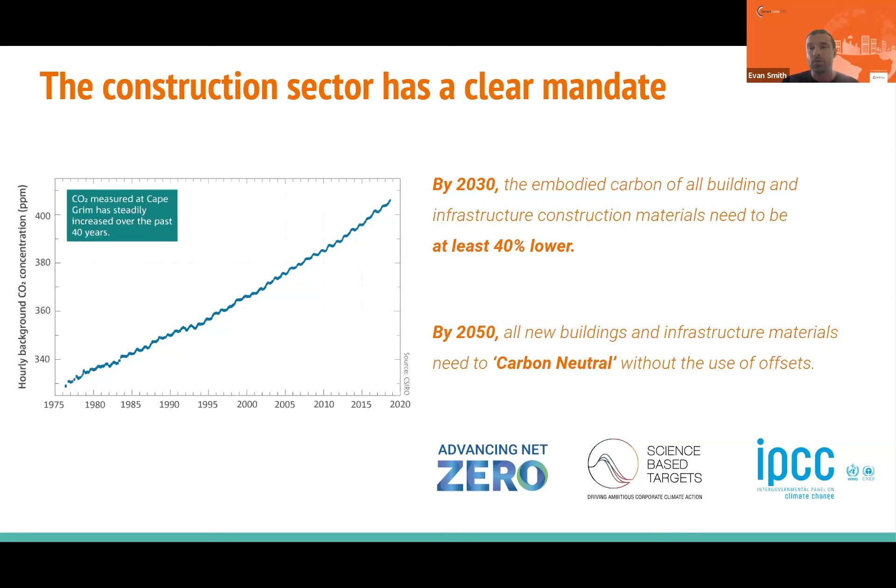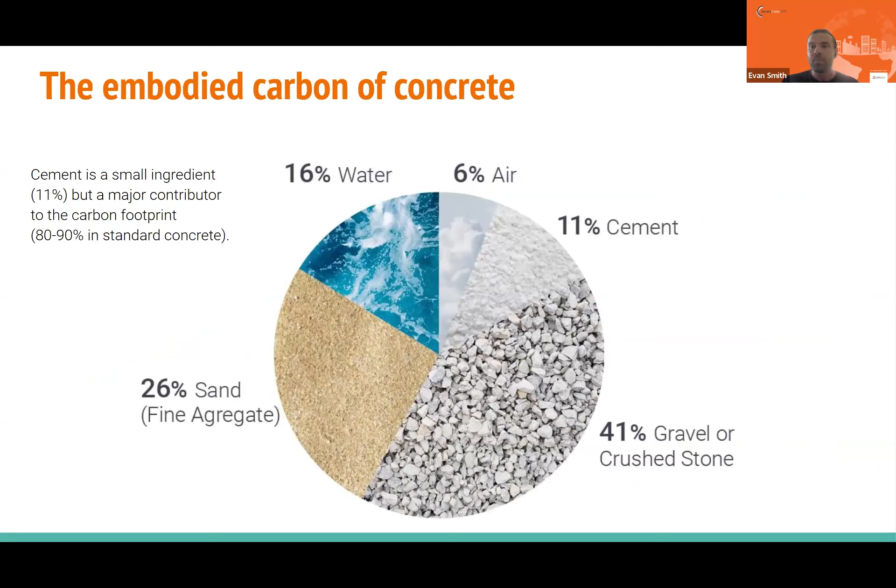Just a brief touch on this as well, just to kick it off. Cement's 11% of concrete overall by weight, but for a standard concrete with no innovation, it's generally 80 to 90% of the embodied carbon of it. It's important to look at this from a life cycle perspective, so then we get the whole picture of what's going in.

So the entire impacts of a material as it comes out of the ground, all the way through the extraction, the processing, the manufacturing, all the inputs that go into it, all the energy and the resources and fuels and electricity that we use to make a product, and then the waste as well. So life cycle assessment covers that. And the gold standard is EPDs for quantifying the embodied carbon of construction materials.

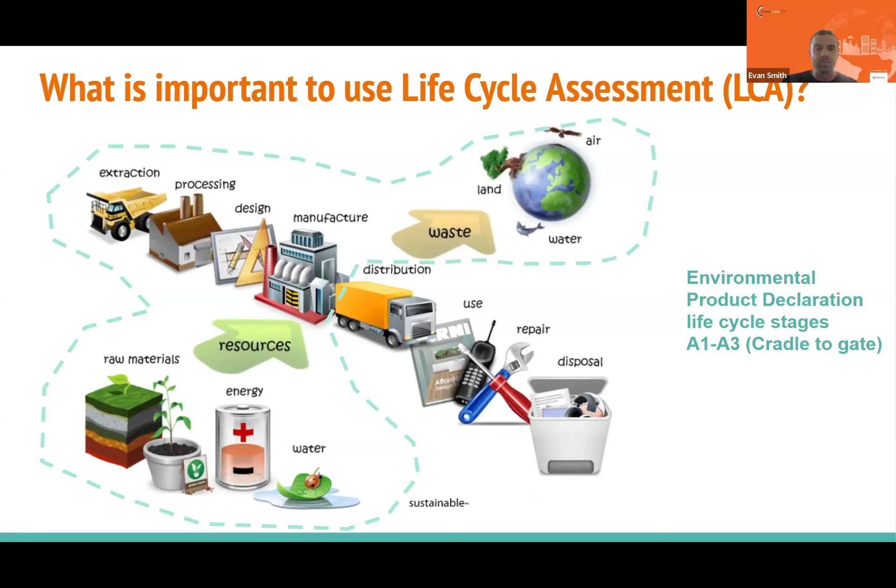So just to touch on some of the work that the MECLA Concrete and Cement Working Group has been involved in, we've recently released a guide to low carbon concrete in Australia, where we decided to have a crack at furthering the conversation and the knowledge as well. So we had a go at defining what low carbon concrete should be: it's the lowest carbon concrete, but still meeting all technical, performance and durability requirements.

In the guide, we've gone through an overview of how to ask for low carbon concrete. So how to specify it, ask for EPDs, why that is important, and why to work in embodied carbon rather than percentage of SCM. We've also included five considerations or typical questions that people get, and also some great links into other resources as well.

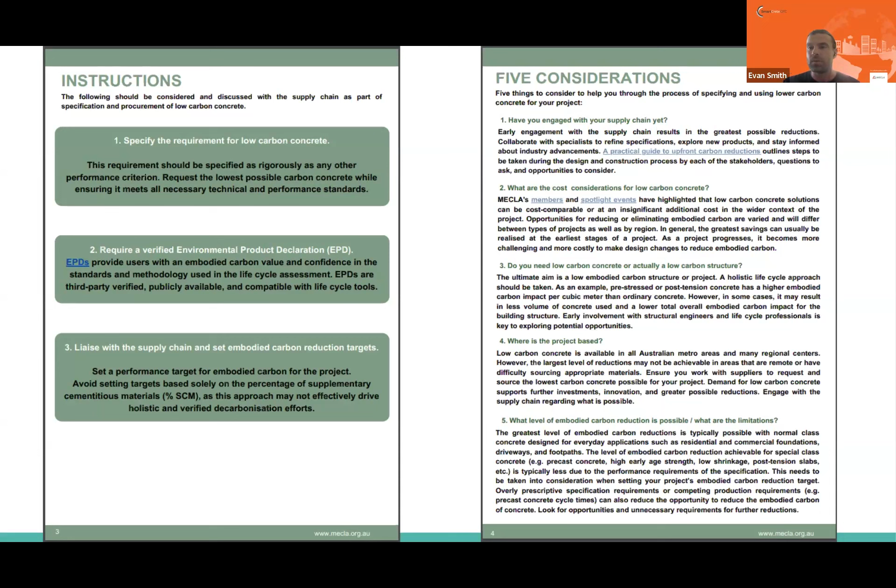So cost, engagement and supply chain, low carbon concrete or actually the low carbon structure, what are we aiming for, where is the project based, and what level of embodied carbon reduction is possible. So some great starting information in that guide. And then for the final page, we had a crack at gathering together all the EPD data for ready mixed concrete in Australia using the EC3 database. This very much aligns with the data set and the approach taken by NABERS as well.

So opening up every EPD for ready mixed concrete in Australia, having a look at what strength it is and what's the embodied carbon for life cycle stages A1 to A3. So it's everything as it comes out of the ground till it rolls out the gate of the concrete plant. And for the first time, it was like, well, what's the maximum embodied carbon for concrete for that strength, or what's the lowest in class, and really to help shift that dial.

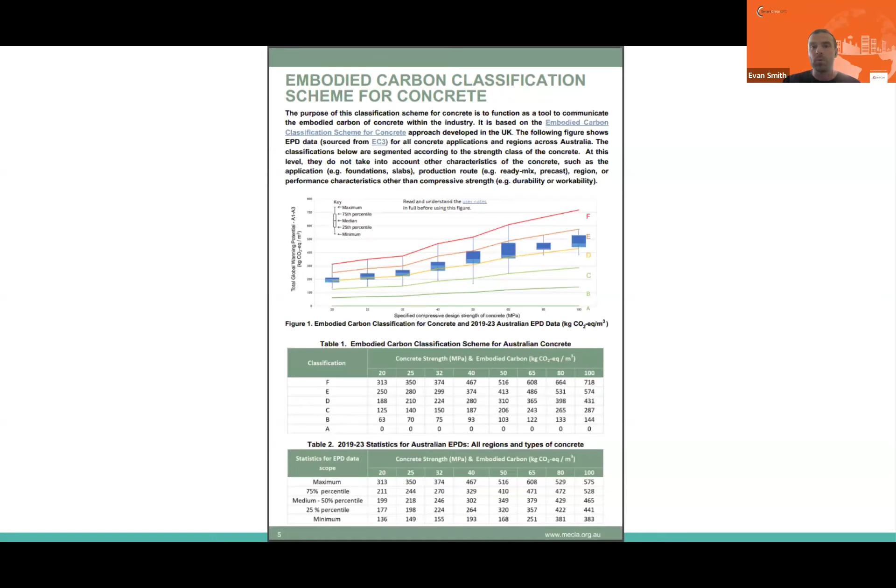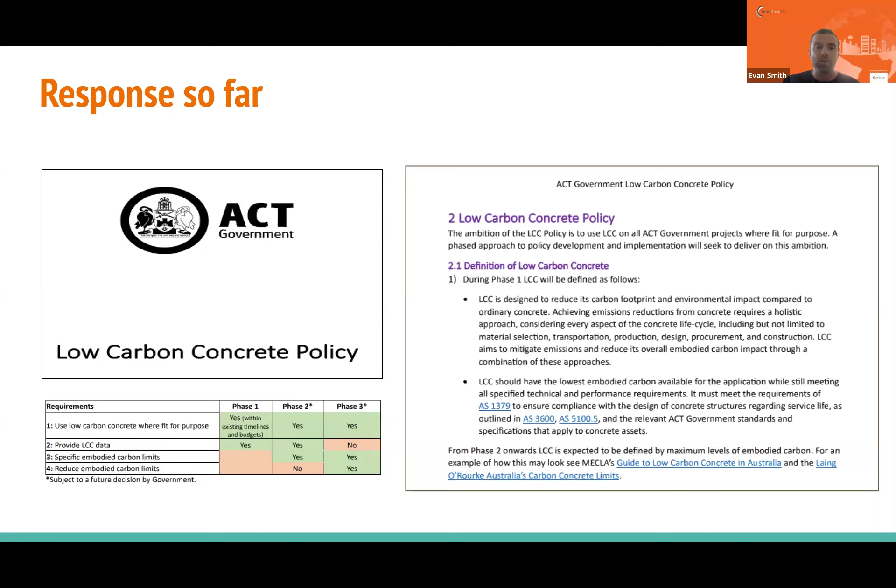So how has it been going since we released that? We've been getting some really great feedback on the guide. We've actually seen the ACT government release a low carbon concrete policy. They've been doing a lot of work in this space, and it was great to see the MECLA guide referenced in their policy, and the proposed approach for phase 1, 2, and 3 as the policy rolls out. Hot off the press, I just saw this last night.

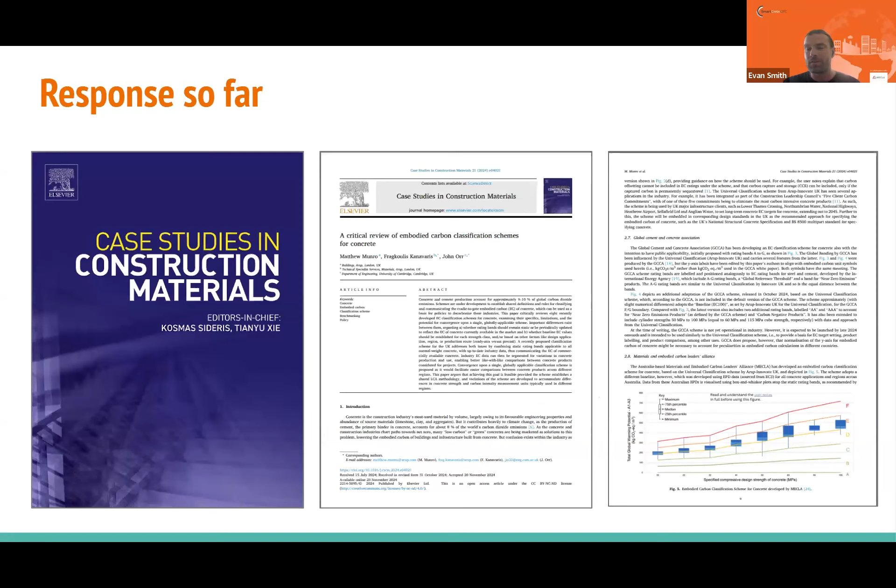There was an international journal paper looking at a critical review of embodied carbon classification schemes for concrete. So right up my alley, and pretty stoked to see the MECLA low carbon concrete guide referenced in that as well. Keen to go through this in a bit more detail. So what are the next steps? Really, we try to highlight in the guide that we're aiming for good, not perfect. It's the first iteration. There's all types of concrete all across Australia as well.

And as we know, it really depends on what application you're using and where you are, depending on what is available, what is low, and what's the lowest possible. So the next step is really to look at location-based data and application data as well.

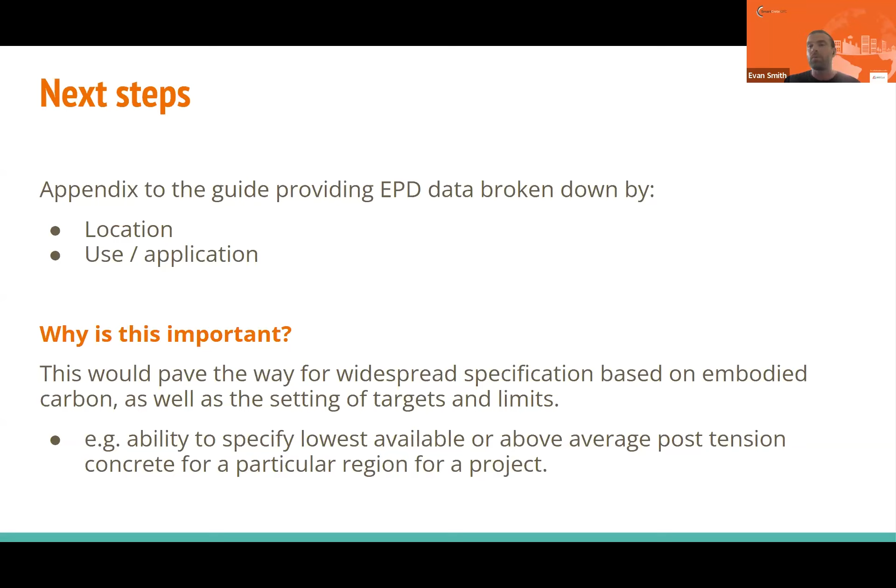So why is this important? Because I think that's the level that we need for companies and projects actually specifying and setting embodied carbon targets for projects. Like if we're doing post-tension concrete, what's the lowest available product in my market, and what's the average, and you can use that then to set specifications and performance targets as well.

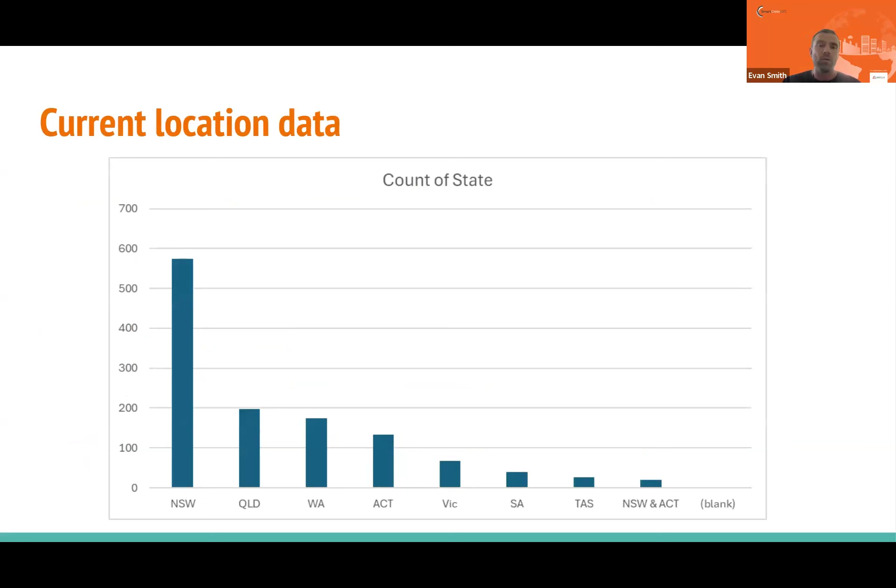So with the EPD data set we have really great data on what location it's from, particularly states as well. So we've got a really good resolution of where the data is coming from, and then the sub data on that as well. But for application or type, we found it's a bit of an issue currently. This is with the available data that we could get for EC3.

So 20% of the data set we knew was normal class concrete, so that's strength at 28 days as well. And then the types really depended on what was included in the EPD and what information the company included. But a big 57% of the EPD data didn't really say what the concrete is used for. So you've got the data set, but you can't really apply it to that next level.

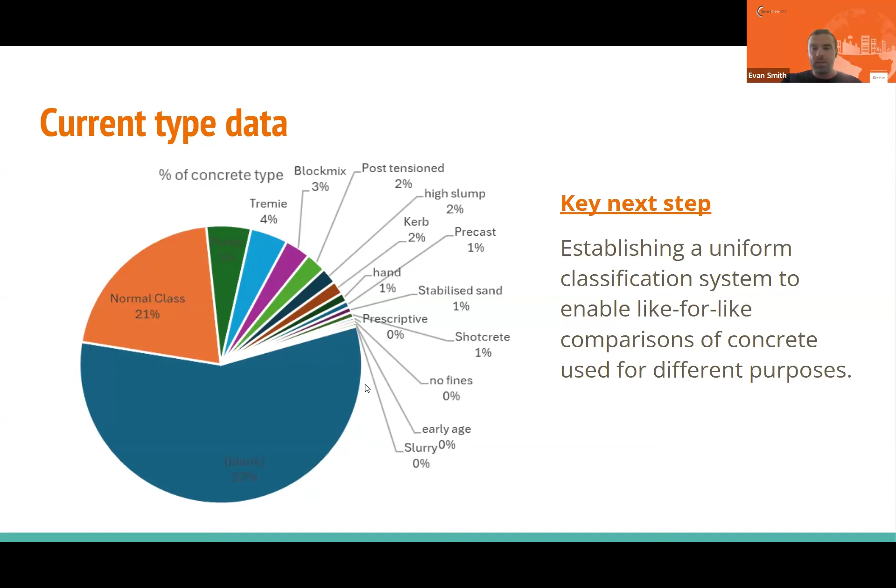So the next step for us, what we're working on, is actually some type of uniform classification system that can potentially be adopted by the industry. If you're releasing an EPD, include the types of applications that it can be used for. So if you're a building project in Sydney, this is what is available in the market. So yeah, that's really it for me.

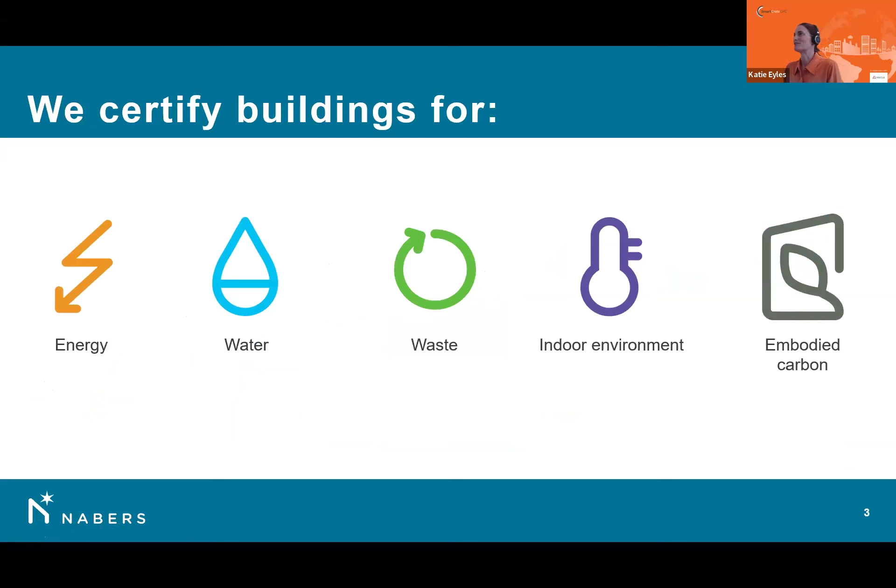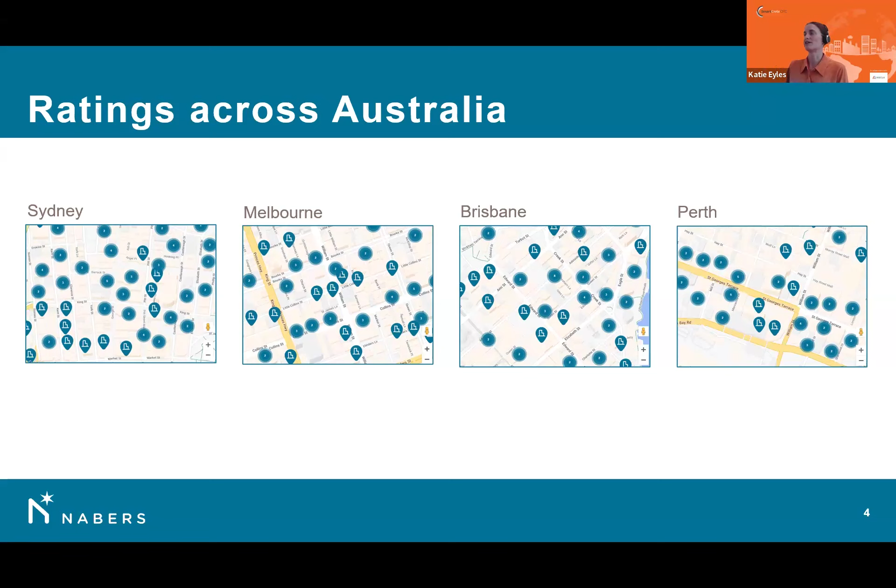NABERS ratings are fairly common across Australia because for some things they're mandated by legislation. For example, for office energy ratings, if you're over 1,000 square metres, you need to have a NABERS rating to sell or lease your building. So fairly widespread across Australia. And what we know from having those ratings over time is that measurement leads to improvement. For example, you can see here for offices and shopping centres, this is energy use over time with the NABERS system.

By about 10 years into it, they've reduced their emissions with energy use by around 40%. So yeah, really hoping to help people measure and improve with embodied carbon.

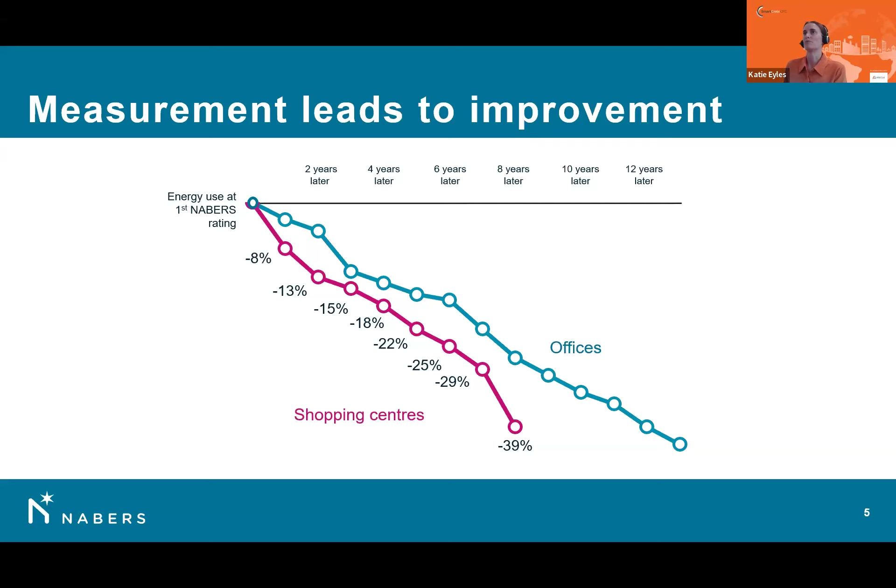We started developing the rating tool in 2021 and have spent the last few years working closely with everyone involved in developing buildings around Australia - developers, architects, policymakers, and product manufacturers - to figure out, if we're going to have a rating scheme for embodied carbon, what do we need to measure? How much of the building are we measuring? What part of the life cycle? What should the rules be about what evidence you need of what was delivered to site? All of those sorts of things. Probably quite a few of you here have helped us with that consultation process, so thank you for that.

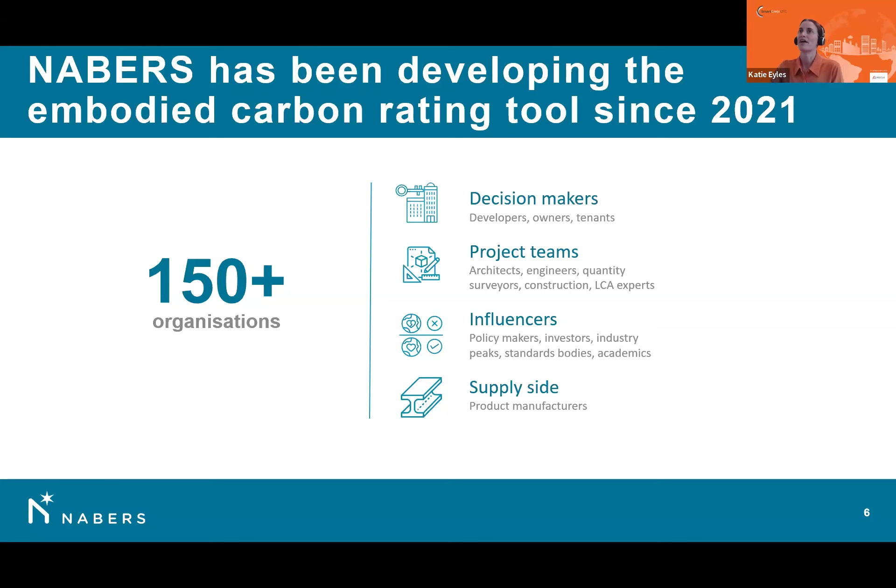So let's start talking about embodied carbon and why we are benchmarking it. We could easily create something where we just measure your emissions per metre squared of a building and leave it at that. But without having that star rating scale, or only using emissions per metre squared, it's hard to tell how good you are in terms of reducing emissions.

For example, if you had two office buildings that each landed on 750 kilograms of CO2 per metre squared, how do you know if that's a good result for each building? Maybe one is low rise, one is high rise, maybe one has underground parking and the other doesn't. Maybe one is in an outer suburb of Melbourne and the other is in inner city Sydney. How do you know what you should be aiming for in terms of emissions? That's where having that star rating scale comes in handy.

Basically how we create it is we gather data for hundreds of buildings. So for embodied carbon, for about 150 buildings, we've done a full life cycle assessment, and we look at what the spread is of the results for different building types in order to understand what we would expect the average emissions to be.

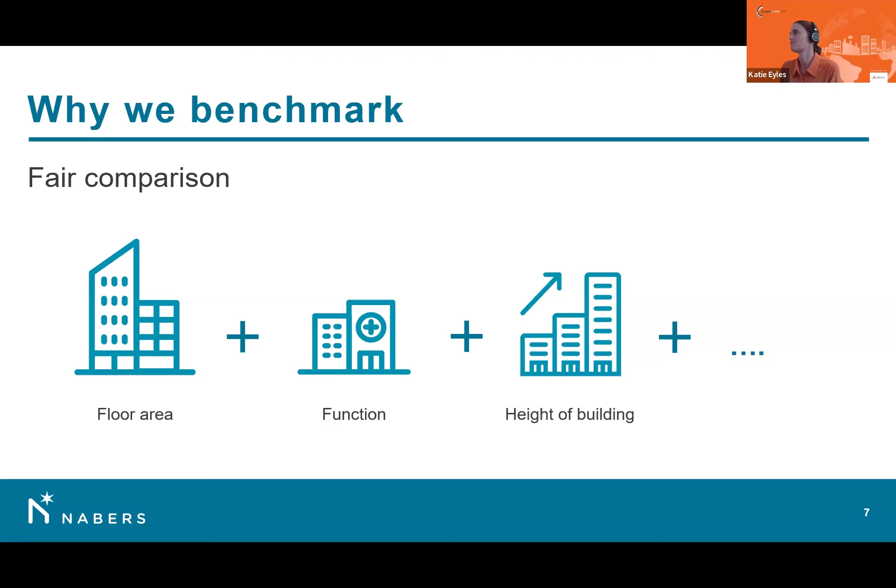In order to do that fair comparison, we take certain things into account. So for embodied carbon, floor area, function, and height of building are really important. We're still going through that benchmarking process, so we're not too sure if there's anything else we need to correct for. But yeah, that's why we benchmark.

In terms of what we're measuring with the rating, we're measuring upfront embodied carbon. Of course, there is interest in whole of life as well, but we've focused on upfront because that's what we can measure now. It can be up to about 80% of the embodied carbon throughout a building's life cycle, and that's the big picture of what we really need to tackle right now. What we can measure right now is upfront embodied carbon without having to go into assumptions about what might happen in the future, which is what would be necessary if we were looking at whole of life. So yeah, focused on upfront embodied carbon.

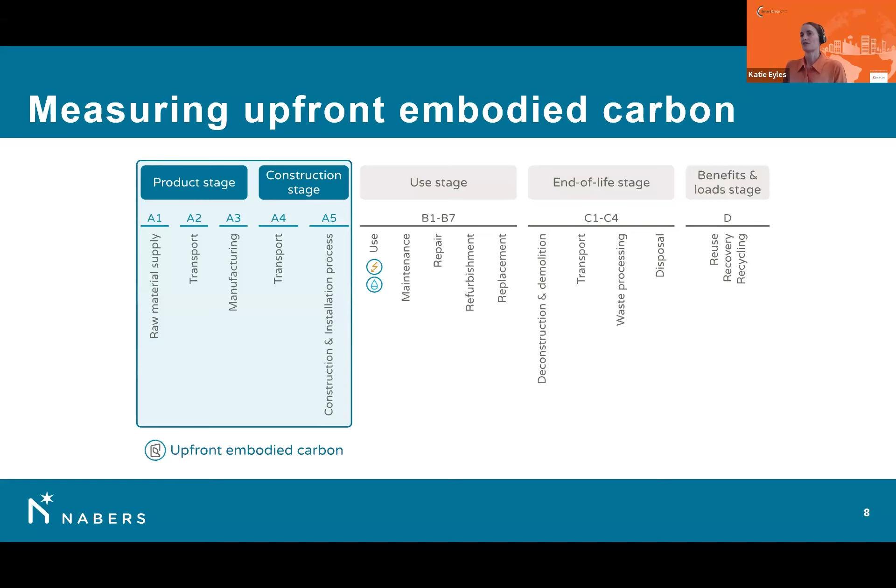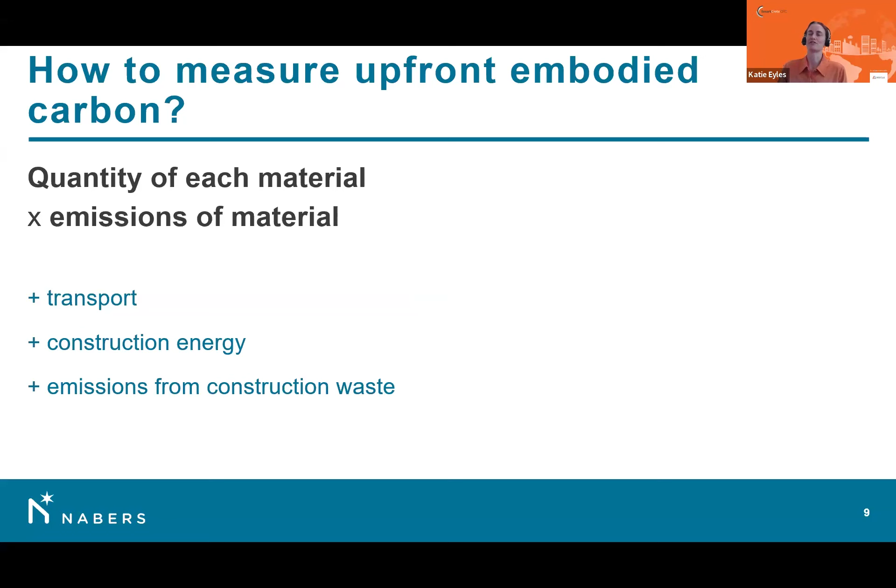And if we're focused on upfront embodied carbon, how do we measure that for a building? Kind of simple in a way, but complex once you get into the details. We're looking at the quantity of each material times the emissions of that material, and then we add on the transport emissions, construction energy, and emissions from construction waste.

In terms of what materials are included, if we're saying we're measuring the materials that have gone into a building, we're really focusing on capturing about 90% of overall emissions. So that's these main things: substructure, superstructure, envelope, some of the bigger internal items such as stairs and floors, ceilings, and then building services and vertical transport.

What's not included is things that are smaller, have less of an impact - fixtures, fittings, fit out materials. The reason why they're not included is because we need the rating system to be practical and usable, and once we get into too many of those details, it becomes less practical. For some of those details, it's quite hard to find emissions data, and it would take a lot longer to gather all the data. So we're really focused on the bigger picture, capturing the vast majority of emissions, focused on materials that we have data for.

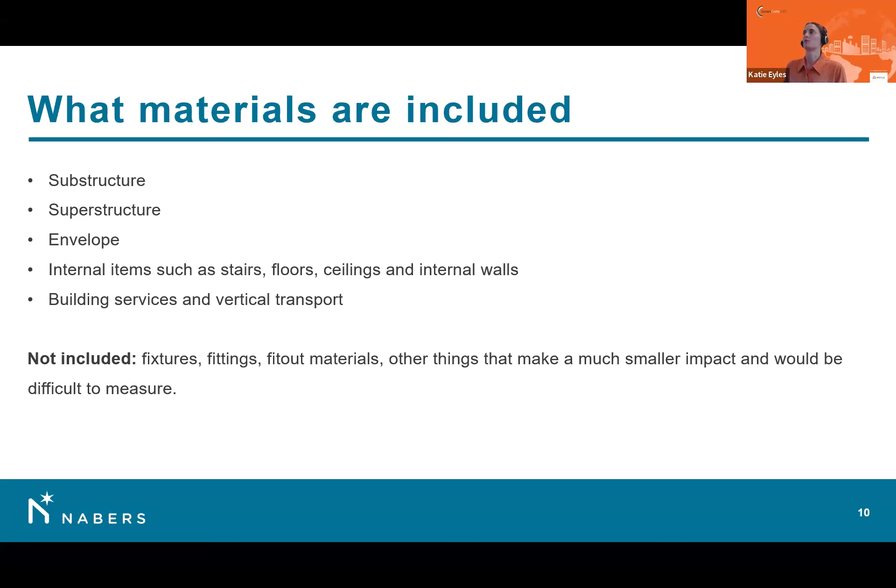What's really important with the rating system is that it's done when the building is complete, so we're focused on as-built data. What that means is if you're doing a rating and you have a product with an EPD, say concrete with an EPD, we really need evidence of what was delivered to site to prove that product was used in the building. So we're talking receipts, delivery dockets, purchase orders, returnable schedules, or other similar things that show us that is the product that was delivered.

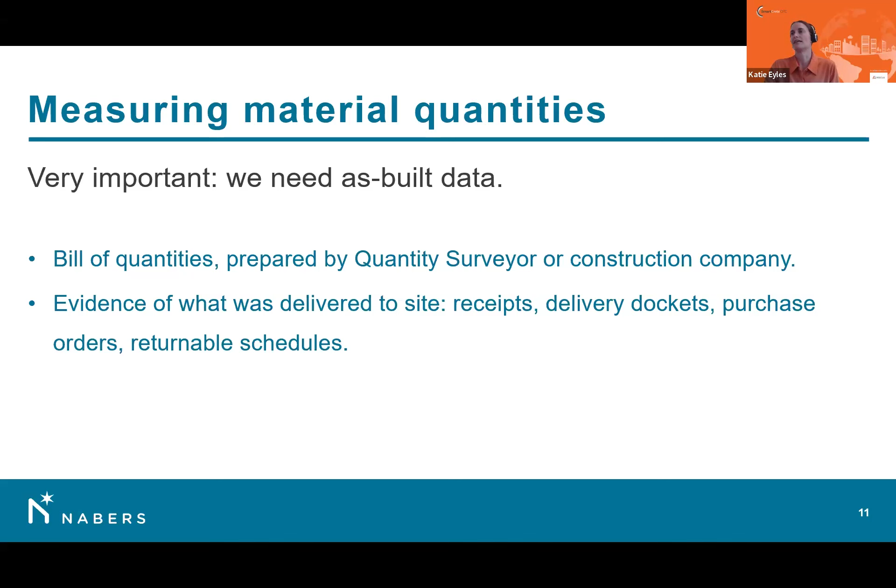In terms of having the quantity of materials, we now need to know what are the emissions for that material. Like Evan mentioned, the international standard and what we're focused on is EPDs. Very strong, in our consultation, we found very strong industry preference for EPDs because that data is product specific. If you're a manufacturer that's reducing your emissions, you have an EPD to prove that you're a lower emissions product. It's rewarding the effort that goes into measuring and reducing.

We know, however, that not every product has an EPD. So to fill that gap, NABERS created a national emission factors database. If you have a building you're doing a rating for and you don't have an EPD or another appropriate source of data, we're also accepting peer-reviewed carbon footprints or Climate Active product statements that match the international standards used for EPDs. If you don't have one of those sources of evidence, you will have to use the default conservative emission factor that we publish in this database.

Quickly, the way we created that was by collecting all of the EPDs we could find for products available in Australia. The conservative default is generally approximately equal to the worst result we could find in any EPD, plus a bit of an uncertainty factor. The reason it's conservative is because we don't want to be rating buildings as better than they are. We want to encourage measurement, we want to encourage people to get EPDs. So we're really focused on trying to encourage people to use products that have EPDs or another appropriate measurement method, rather than having to use the conservative default factors.

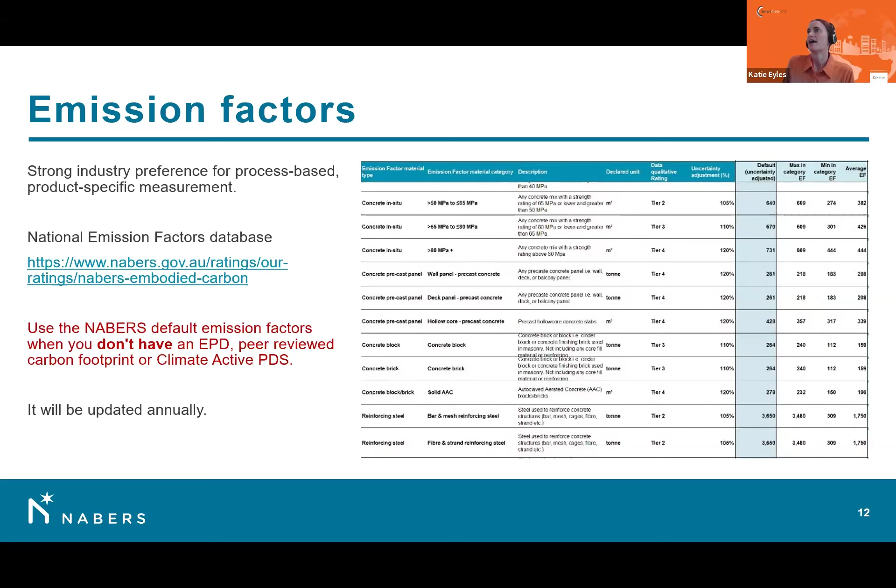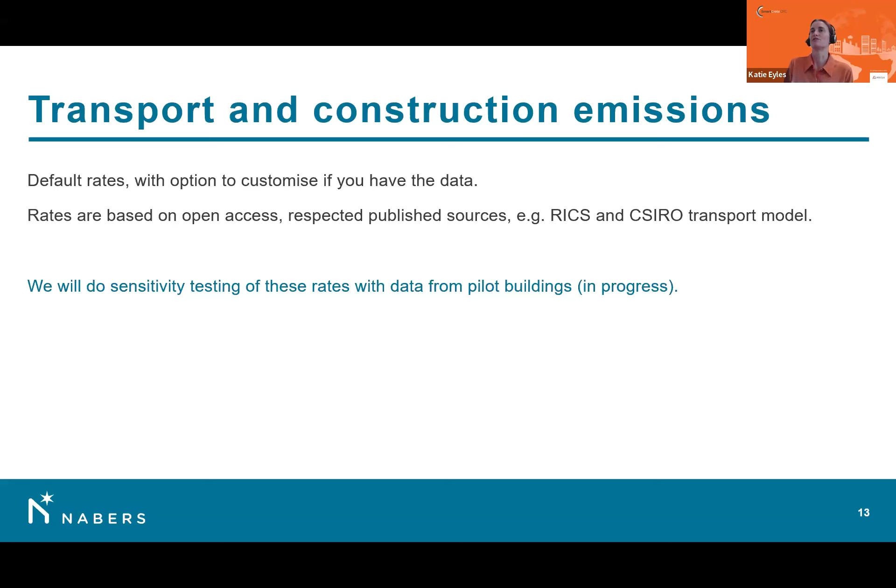Transport and construction emissions, we have default rates for those that we can add on that you can use if you don't have your own data. If you do have your own data, then you can use that as well. But essentially that's it: materials, the emission factors for those, and then adding on the transport and construction emissions.

In terms of what can be rated, new buildings and partial rebuilds within 2 years of completion. We've got a huge variety of building types that can be rated, from offices and residential things like hotels and apartments through to retail, industrial, and various other types like museums and art galleries. Not all of those will have a star rating scale though, because we couldn't collect enough data to create a star rating scale for every building type. I'm sure you can imagine there's a limited amount of art galleries, for example, that have been built in the last few years that we could collect data for.

So some of them we will just certify with their total emissions per metre squared, and other building types that there are more of, like offices and residential and industrial, we can put a star rating scale on for.

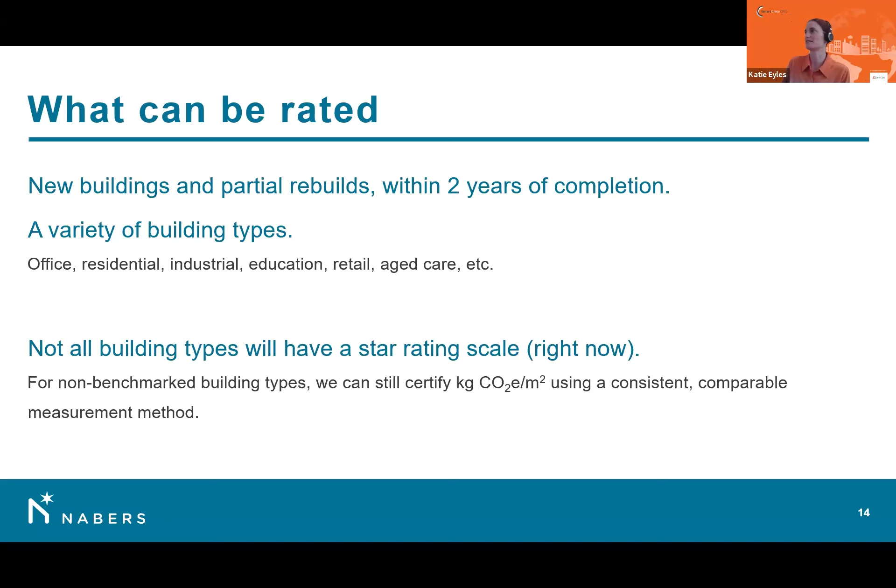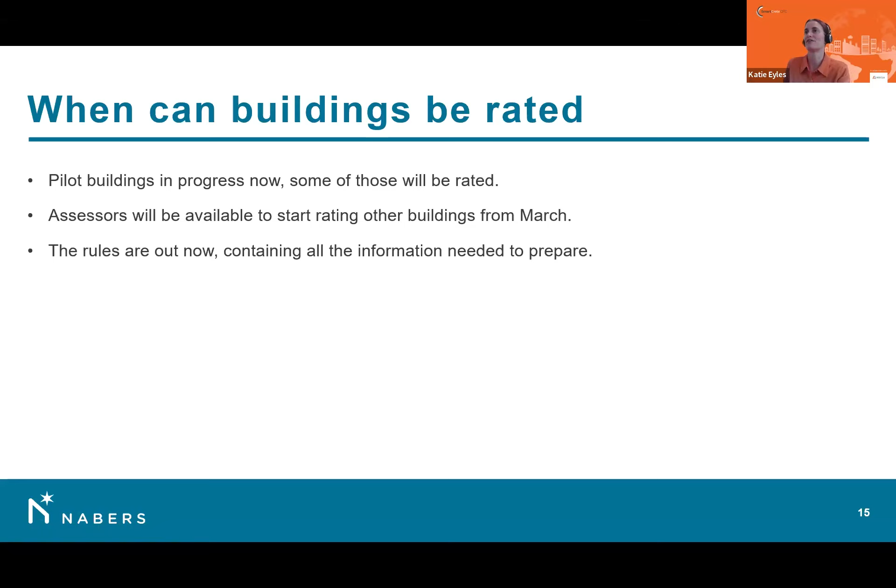In terms of when they can be rated, pilot buildings are in progress now, and some of those will be rated. We're doing training for assessors in February, so they will have passed their exams and be able to start rating buildings from March. And if you're curious about what's required to go into a rating, what evidence needs to be collected and all that sort of stuff, the rules are out now, published on the NABERS website. So all of the information you need to prepare is there.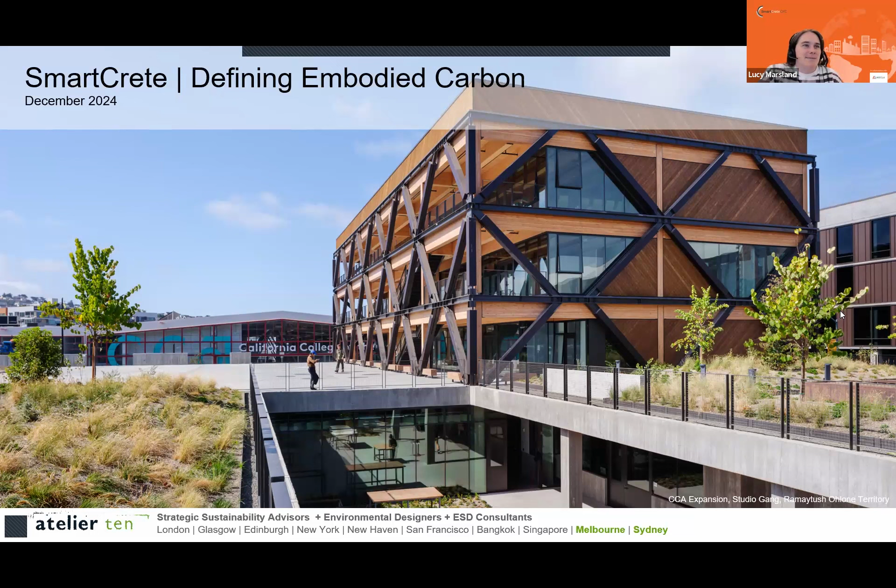One thing I've been thinking about a lot this year is looking beyond measuring - measuring is one part of the puzzle, but as a sustainability consultant, and as anyone in the value chain of buildings, there is more. There's things to do before we measure, and things to do as we measure. So I'll share some of those ways of working that we do.

Normally I'm considered on a project as the person measuring or calculating the carbon, and I'm in charge of the upfront carbon on my project. However, in fact, I can never do it alone. A big part of my role is to be a facilitator, to do education and enable collaboration between my discipline, designers, my client, as well as our builders and their suppliers downstream. One thing to note from my wiggles of arrows is how much there's a two-way conversation - it's not something we do in a vacuum.

So when we're measuring carbon, whether it's for a NABERS rating, Green Star, or any other reason, we engage in it early, we engage in it often, and we need to both receive inputs and give feedback, so that initiatives are implemented in the design and we have accurate information to measure the building itself.

One of the first things I always do on projects, and also when teaching with universities or in spaces like this, is focus on education and celebrating best practice and opportunities to innovate and get creative. That comes with literacy, and we've seen such huge growth in carbon language and shared understanding of concepts. We're also seeing amazing projects, both in Australia and globally, pushing the boundaries of what's possible and driving down upfront carbon. It also gets everyone a bit excited and builds enthusiasm so we can get into some of the slightly less glamorous components of project work - we always try to start with enthusiasm and some nice case studies.

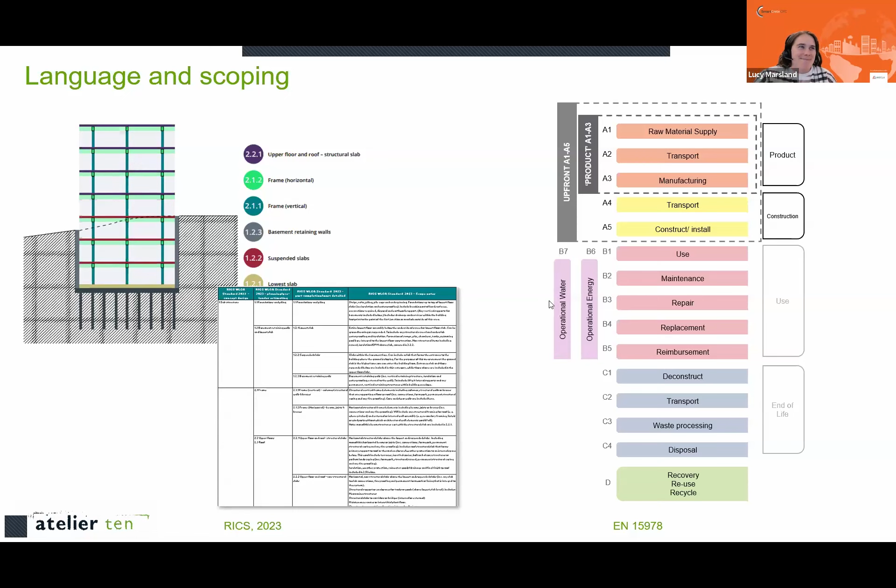I really like it. It really lays out some details, gets into the discipline-specific moves or roles, and gives some simple tools. A big spreadsheet, I know it can be daunting, but it allows us to keep accountable and build carbon to also value decisions and track decision making with our clients and with our design discipline team. So the big spreadsheet is where the great dialogue happens often and is documented for the legacy of the project. So I'm a big fan of the big spreadsheet, and I hope others out there are too.

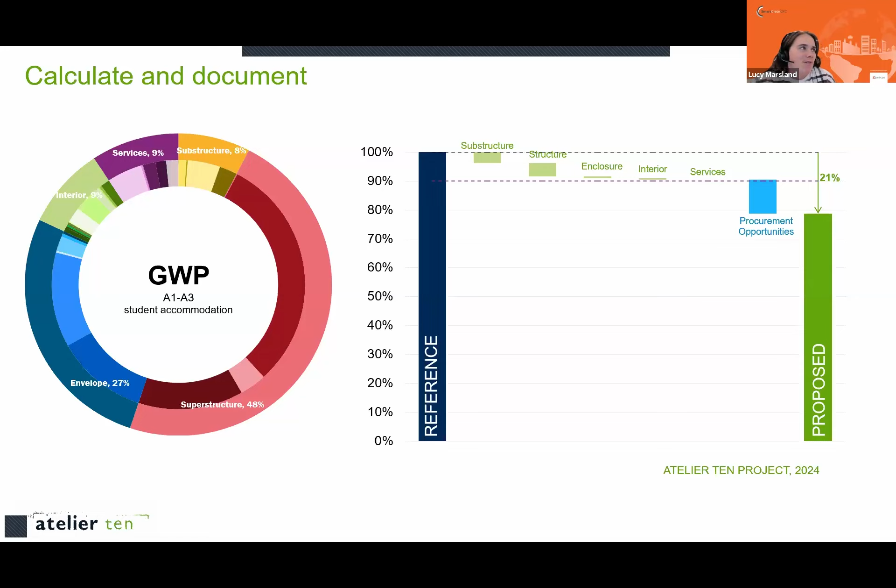Brilliant. Thank you so much, Lucy. That was wonderful to really immerse into your world and see how you're tracking this. And I think what's so brilliant is being able to see the synergies between the way you're tracking carbon and the vision that Katie painted for us in terms of being able to link the global warming potential with those bill of quantity numbers. So really exciting to see the leadership that you guys are forging ahead with at Atelier Ten. Thank you so much.

So finally, we're going to now think about what next? Where are we going with all of this? And who better to help us have that conversation than Alison Scotland, who's the Executive Director at the Australian Sustainable Built Environment Council. So ASBEC are absolutely leading the charge here in terms of coordinating a huge effort to bring together a whole bunch of peak industry associations that are working in this space and help to drive that conversation behind next steps for policy.

So let me do a quick introduction. So Alison is Executive Director at ASBEC, which is a body of peak organisations committed to a vision of more sustainable, productive and resilient buildings, communities and cities. Her passion and expertise lie in collaborating with industry, government and third sector leaders to develop national policy and technical solutions that enhance the built environment.

And there is no better networker than Alison herself. So over to you, Alison. Tell us, where are we going with embodied carbon?

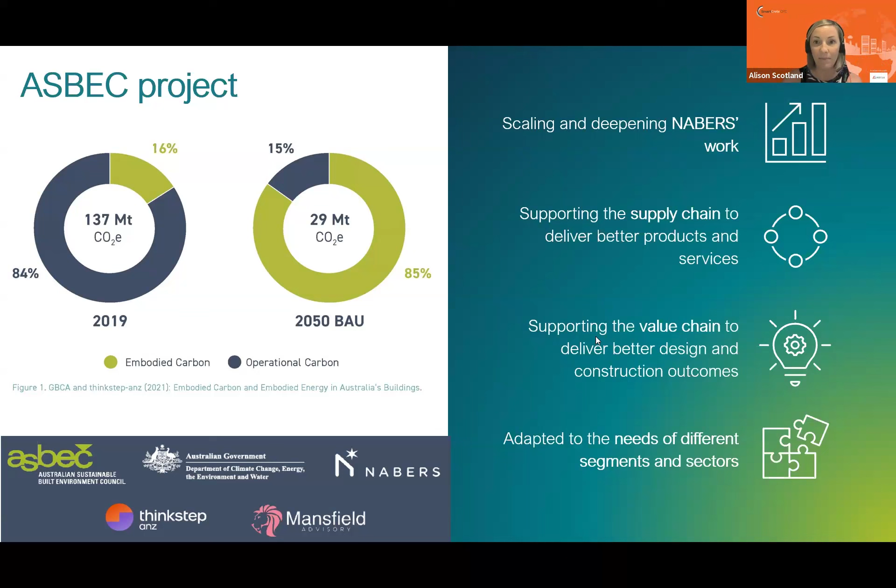In the middle of the year, we published an issues paper, launched it at the NABERS conference, and that's where our wonderful consultants did an analysis of all the policy out there globally that looks at embodied carbon in some form. We did a big review: what stages are they looking at? How do they measure? How do they report? What's their process in terms of signalling, measure, disclosure, and applying reduction targets or budgets or limits? So we had an international study.

And then, standing on shoulders of giants, we were able to bring in experiences from the processes that NABERS had when they developed their embodied carbon tool and methodology, the preliminary work of ThinkStep and Green Building Council at the very outset, and then the work that Infrastructure Australia did in their baselining project.

All of that stakeholder consultation went into our issues paper, where we established what we called the 7 decarbonisation dilemmas, but in essence, they are both challenges and opportunities, that if we get all of this right, the supporting policy ecosystem will really help all this amazing work happening in all parts of the buildings and infrastructure value chain.

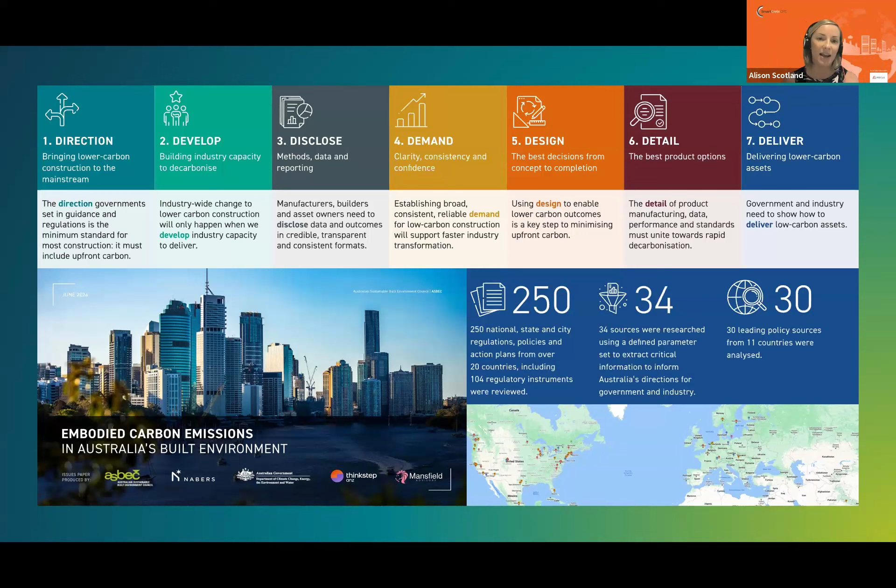So that was released, and we had a big consultation, lots of working groups, and heard from the huge stakeholder network at MECLA, and that's helped feed into our process. So we know we need to tackle these decarbonisation dilemmas. We know that there's so many initiatives, especially from a MECLA point of view, even within SmartCrete CRC, and all of the amazing experts out there like Lucy's team, and even in NABERS.

But there's so much knowledge out there, and we are continuing to understand how we reduce our embodied emissions. Industry is very much on the journey, but we know that to really get the scale that we're talking about, we need government intervention. We need government to help us.

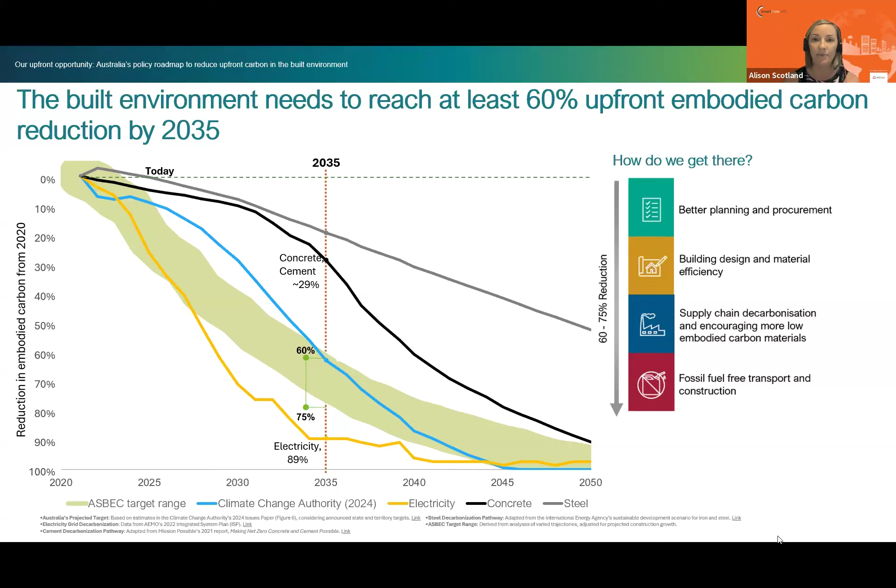Of course, material substitution with low carbon alternatives is a big part of it, and it's wonderful to see the likes of SmartCrete CRC and MECLA apply those targeted strategies in how to create those low carbon materials that we need. But again, if we look at the A4 and A5 component, we know that there are certain asks that are needed, and that's the fossil fuel free transport and construction processes. So all of these things, they all need to happen.

We're talking about something that is systemic. Everything everywhere all at once. So you can't just focus on one at the expense of the other. Right now we can be looking at how we procure better, how we design better, how we make better use of our resources, or how we make decisions about whether we're retrofitting or reusing our structures, how we're adapting our structures. Those things can happen now, but at the same time, we know our supply chain needs to decarbonise.

The concrete sector, we know you're working on all of those amazing things to get that clinker as low as possible in terms of emissions output. But we need to set those mechanisms in place now, so that we can get the future benefits. By 2050, we want you to be decarbonised. The built environment wants to signal that we value your low carbon materials. We value you looking at your abatement and how you can get that as low as possible.

With that in mind, we realise it is a trajectory. What you need to do now versus what you're doing later will change. And so what we're doing as part of our work is identifying the supporting policy mechanisms that need to kick that into gear. And what we've found in ASBEC is those mechanisms are quite varied. You're talking about the biggest teamwork that you need. So all across the value chain, there's different policy mechanisms that can promote change.

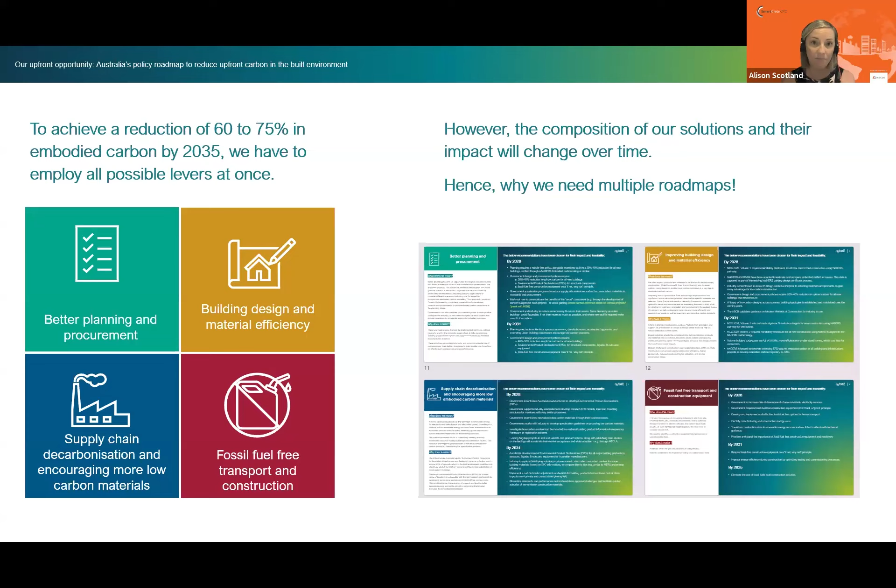One thing with buildings, say for instance, there's the requirement in the National Construction Code, signaling that we are going to be measuring and reporting soon. As soon as we collect the data, we're going to be mandating reductions. But there's all these other mechanisms as well that need to fit into it. What about planning? What about ways to incentivize the supply chain to do more EPDs? Because even from an EPD process point of view, if as a manufacturer you're going through the EPD process, you'll be able to understand your processes and potentially reduce more once you understand.

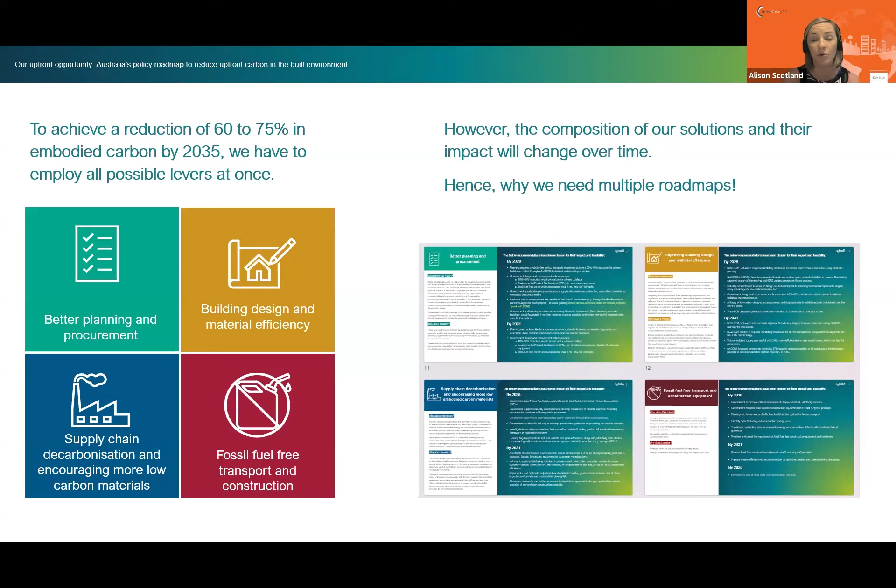So that's what's coming in our big policy roadmap that we hope to release at the beginning of next year. We know that there's a lot that's going into this. We have some really key initiatives that we think as a priority need to work out. So we're working with our stakeholders and working groups to really refine these so that our messages are succinct, wonderfully working with all of you anyway, and hoping that our high level recommendations are able to support your own roadmaps as a sector as you go through your own abatement processes and trying to scale up the low carbon materials that you really need to produce.

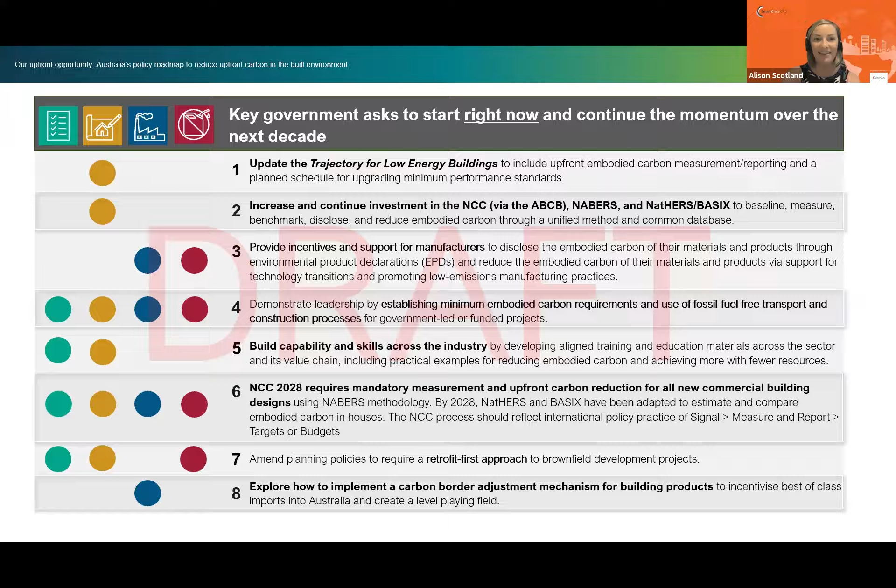So really looking forward to continuing to work with you all to get this policy roadmap out there. And that's it for me.

Thanks so much, Alison. I'm really excited to see that progress, and it's great that ASBEC and also MECLA can be used as vehicles to have those very powerful discussions, because we really do need to coordinate across not only the concrete sector, but far more broadly than that. I think it is really interesting seeing that you're really demonstrating there that this isn't just a materials push. We really also need to be thinking about how those materials are used, which again speaks to the fact that we have to coordinate across the full supply chain. So yeah, thank you so much. Really great insights. We will watch that with great enthusiasm as you develop your policy paper.

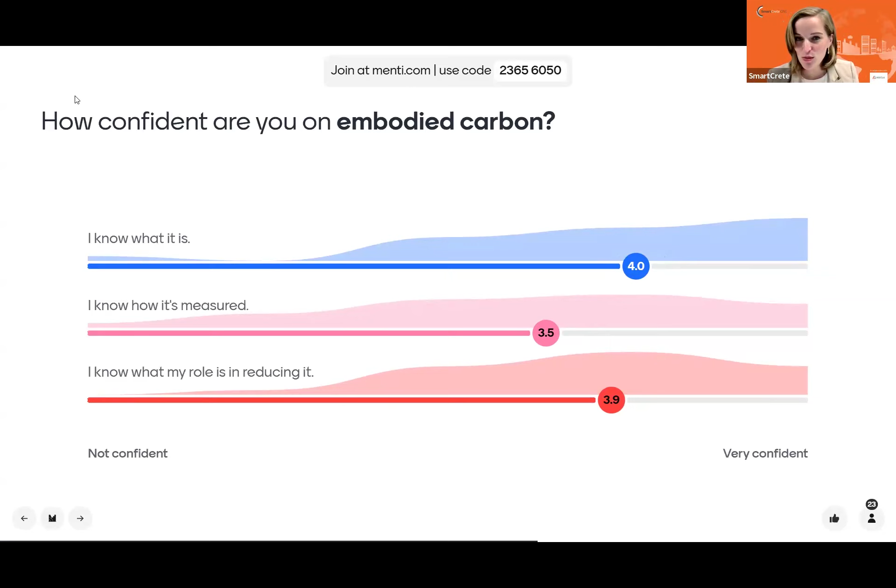Great. So our first question was, how confident are you in terms of embodied carbon? You know, in terms of understanding what it is, how it's measured, and what your role is. And it's so great to see that everyone feels quite confident. That's really good. Hopefully we're having enough of these discussions as a sector that we really know now what we're talking about and how to apply those principles. If we move on to the next question.

Yeah, so what's next? So this one's going to be a little bit hard to summarize, but we'll scroll through a couple of those answers. It's great to see skills on there. Absolutely something we have to keep focusing on. Field trials, yeah, just that engagement. Great to see a couple of PhD students on the line. Thank you for joining us. You are our next generation, so we definitely want to include you in these conversations.

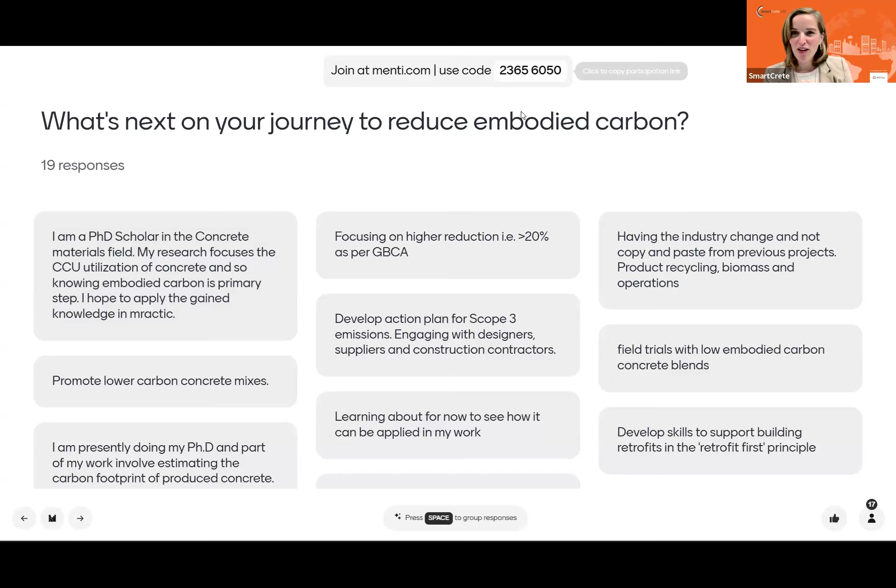So I might ask all of the panelists if you want to join me back on the call. We're now available to have more of a conversation. I can see we've got a question already here from Daniel, so I'll start there. Do these strategies take into account the ease of access of public transport and adequate cycling infrastructure? That is a really fascinating question. Alison, you've got some thoughts? Yeah, happy to field that.

And I love it because as we've been going through the ASBEC journey, initially we started our project with a buildings focus because that's where NABERS works. But we share the same supply chain across buildings and infrastructure, and there's a blurred line anyway. From a National Construction Code point of view, it talks about schools and hospitals, but more often than not, from a government procurement point of view, they're the ones delivering a lot of hospitals and schools. So we need to ensure that the policy for buildings and infrastructure are aligned. Very long way of saying,

Infrastructure New South Wales released a report last year, a really fantastic report around decarbonising infrastructure delivery. It employs a lot of the PAS 2080 concepts, and it's around the whole avoid question. So avoid is looking at exactly what Daniel mentions in terms of, do I actually need to build this structure? What is the problem I'm trying to solve? And what is actually the lowest carbon option in that regard?